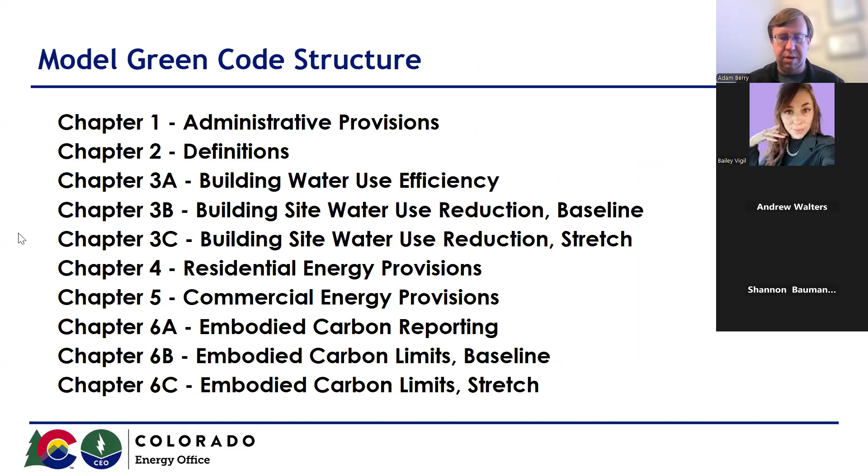So there's probably some questions as to why we structured the Model Green Code this way, with these sub-chapters that have differing levels, where we have a baseline chapter and we have a stretch chapter and we have reporting chapters or simpler, more entry-level chapters. And whereas most building codes are just going to be a long list of requirements you have to meet, and you have to meet all of them unless you're exempted from them, this is structured a little bit differently for a reason. And mainly the reason is to give jurisdictions different entry points into the stretch code.

Recognizing that this is a code that goes above and beyond where most jurisdictions are when it comes to energy or sustainability, we wanted to recognize that not all jurisdictions are in the same position to adopt a really stringent stretch code. And so we wanted to provide some easier entry points where a jurisdiction who may not have the political will or may not have the capacity to enforce, or any other reason, could still potentially see some provisions in this code that may be attractive to them.

Within the water efficiency sections, there's a chapter that focuses exclusively on building fixtures, so things like shower heads, toilets, appliances, all of those different types of things, and reducing water consumption from just the building itself. And then some of these other chapters address water efficiency and reduction of using potable water at the site level.

So things like landscaping. On the energy side, this really does kind of build off and goes beyond the state energy code. So there are a lot of pathways that go above and beyond where the state energy code would take you, but it is designed to layer on top of the state energy code as appropriate.

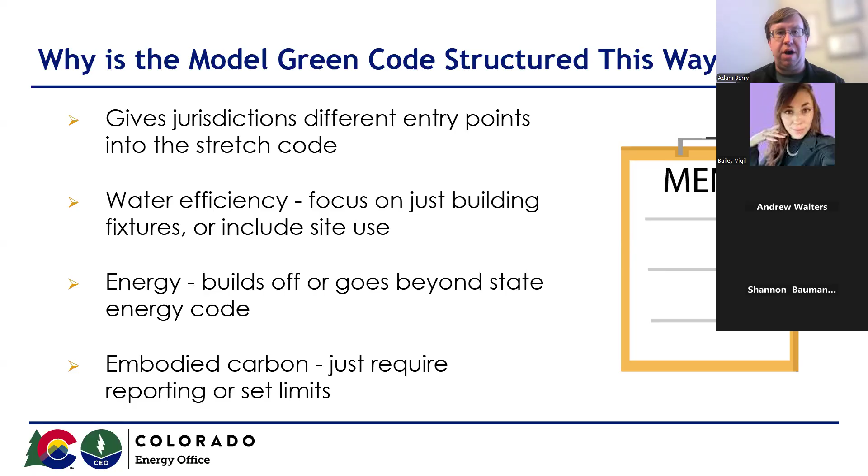And then within the embodied carbon sections, there's a chapter that just requires reporting, and then there's chapters that require actual embodied carbon reductions and limits on the embodied carbon amounts that a building can have either in the materials or at the building level. So recognizing that these different chapters and the structure of the code is meant to be a bit more of a menu of options rather than just one code that you have to either choose to adopt or not.

So that brings up the question of how would a jurisdiction go about adopting this code. So I just want to really quickly highlight that section 101.5 of the code specifically outlines how chapters 3 through 6, which is water efficiency, energy, and then embodied carbon, all work and what they cover, what each of these subchapters covers, and how a jurisdiction should consider adopting based on what their particular interests are.

And so, recognizing that this code is not a code that should just be adopted in its entirety, as most building codes are. If you were to adopt the entire code as it's written, some of these provisions would conflict because some of them are addressing the same requirement, but doing it in a more ambitious way. And so if you were to adopt both requirements, it would be very confusing as to which one you were actually requiring. And so I put down bullets here to what that looks like.

So chapter 3A, as I mentioned, is that one that is just focused on the building water level usage and not the landscaping. So it can be adopted by itself if a jurisdiction wanted to, but chapters 3B and 3C are both focused on that building site landscaping approach. And so 3B and 3C are regulating the same things, but at different levels. And so if you were to adopt 3B and 3C, it would not work very well because there's conflicting measures. So just wanted to acknowledge that you could adopt 3A and 3B or 3A and 3C, but you couldn't adopt both 3B and 3C.

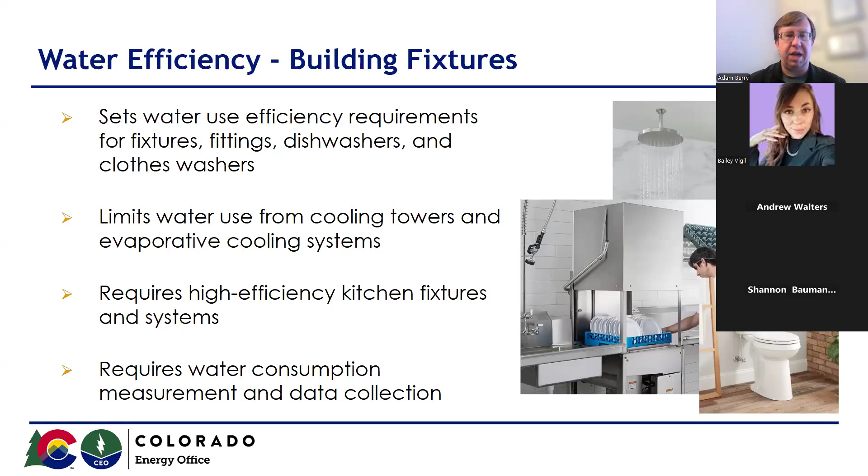Looking at chapter 3B, that's more focused on the site and landscaping of buildings, looking at it from that more baseline level. So this section of the code requires a certain percentage of the landscaped area to be native plants or rainfall adjusted plants. So plants that essentially don't require a lot of irrigation, but are either native to Colorado or are designed in a way that can utilize our existing precipitation and moisture levels, as opposed to requiring a significant amount of irrigation. It limits landscape irrigation with potable water.

So if you are trying to irrigate with potable water, there would be a certain amount that you are allowed to use potable water for, but the rest would have to come from what the code defines as alternate sources of water. And then also having irrigation controls for these systems, to minimize how much water is being used at any given time, and to evaluate whether or not watering of these landscapes is necessary at any given time. It limits how much water you can use on rooftops, vegetated roofs.

So to make sure we're not just spraying a bunch of concrete and actually utilizing the water for keeping plants alive. And similar to the first bullet there, trying to encourage native and moisture adjusted plants to be utilized. And then finally, if there are any decorative water features and pools, even water closets or urinals or anything like that, setting requirements around having to source water from alternative sources other than potable water to use for those systems.

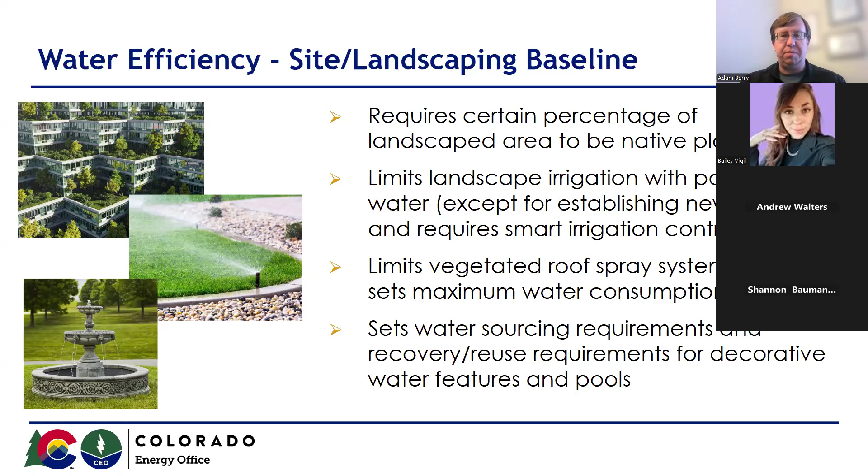And then looking at chapter 3C, which is basically just a stretch version of chapter 3B. Essentially, it requires a higher percentage of those plants in the landscape area to be those native plants or those climate adjusted plants than the baseline. So I think the baseline is something like 60%, and I think in the stretch you have to have 80% of all plants meeting that requirement.

This stretch section prohibits entirely irrigating with potable water. So whereas the baseline just limits how much potable water you can use for that landscaping, this section prohibits it entirely and requires that all water used for irrigation must be provided by alternate sources of water. And also, I just really want to be clear when we talk about irrigation, we're not talking agricultural irrigation. We're talking about watering yards and building sites. So we're not talking about food production when we talk about irrigation in this context.

And then a lot of the baseline requirements are maintained here as well for the decorative water features, pools, and irrigation controls. And then one addition that this chapter has is the requirement to utilize water reclamation systems. So that could be a gray water or other type of water reclamation and treatment system that then recycles the water for other uses in the building. So this stretch chapter of the water efficiency section requires those systems to be installed and utilized.

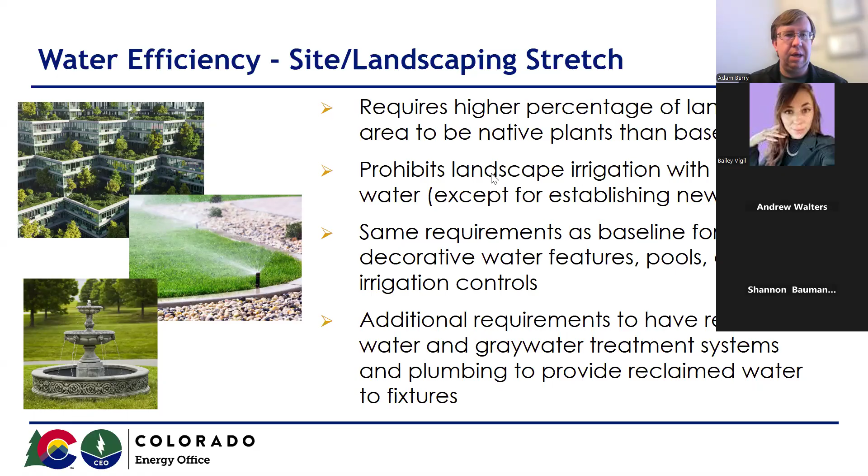All right, moving on to energy. So first we'll tackle the residential side of energy, and then we'll tackle the commercial side of energy. So chapter 4, the residential energy provisions chapter, attacks energy in a way that is above and beyond, as I mentioned, the state minimum energy code. So it establishes a few mandatory requirements for residential energy to have in place. If you are familiar with the low energy and carbon code, some of these are already required in our state minimum energy code, and we just wanted to make sure that they are maintained as well in the green code.

So for example, demand responsive controls for water heating and space heating and lighting systems. And then locating ducts in conditioned space. So ductwork generally is not required to be in conditioned space in the energy code. But if you don't locate it in conditioned space, then you have to do other insulation and sealing requirements. And so there's a lot of value, from an efficiency perspective, in having those ducts in conditioned space. So this code would require that all those ducts are located in conditioned space.

It would require the utilization of energy management technologies, so technology that can essentially monitor energy use and adapt loads as necessary based on either the capacity of the panel or other conditions relating to grid conditions. We actually had an energy management webinar a few weeks ago, so if you haven't had a chance to look at that, I would encourage you to go review that presentation. And then electric, solar, and EV ready code requirements, again, those are part of state minimum code already, and they are just being maintained in this code as well.

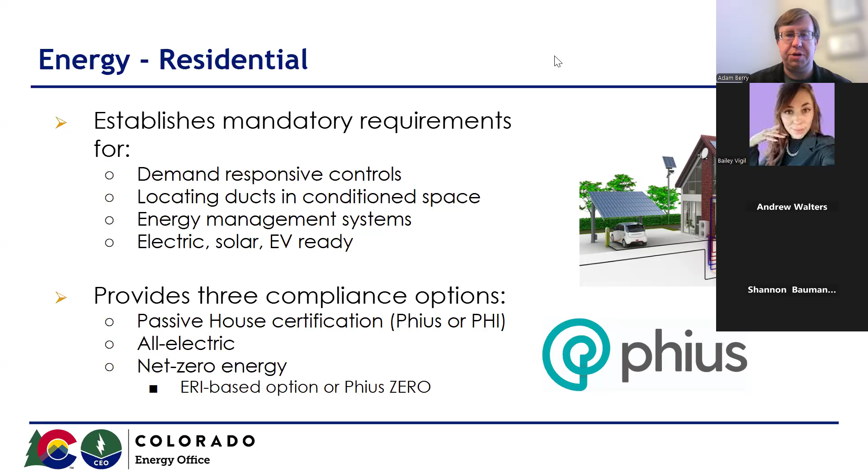Moving into commercial energy, again, similar to the residential side, there are a number of mandatory requirements. Two out of these three are already required by the state minimum energy code: the demand responsive controls and the electric, solar, and EV ready requirements. And then the additional mandatory requirement for the commercial energy side is that these buildings must be provided with an energy consumption measurement and data collection system.

So something similar to what I was describing on the water efficiency side, where you have a system that measures the amount of energy being consumed by the building, at some level dependent on the different end uses, and measuring how much energy they're consuming, and then is able to provide reports on the data collected by that system.

Also similar to the residential side, there are three compliance pathways for the commercial and multifamily buildings. Two of them are similar: one is a passive building certification, again, either through PHIUS or PHI, focused specifically on the commercial and multifamily certifications that PHIUS and PHI have, and then an all-electric building option as well. And the one option that differs from the residential side is an additional efficiency option that is different from the passive house or passive building certification.

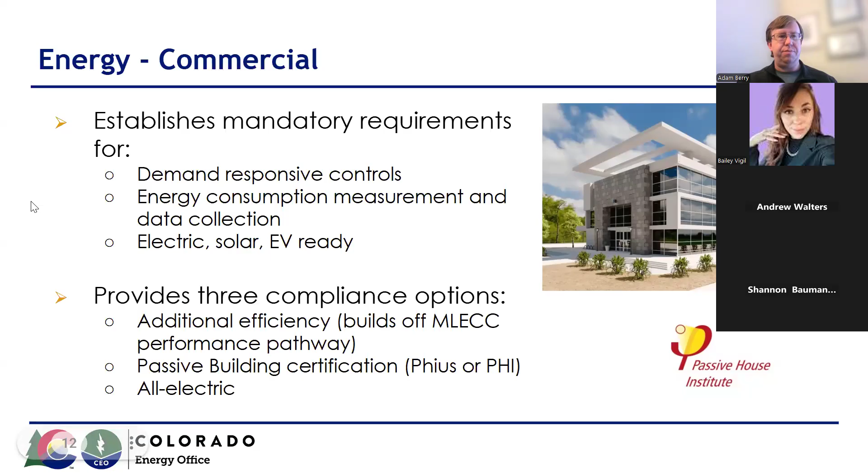All right, finally, we're going to get into embodied carbon. I'm just going to do a brief, quick overview in case there are folks here who are not familiar with what embodied carbon is. I wrote this definition on the right there, so don't be mad at me if there's any slight mischaracterization in the writing of it. But basically, embodied carbon is carbon associated with extraction, transportation, manufacturing, use, and disposal of materials in not just the building industry, but also infrastructure projects more broadly.

So Bailey might mention a little bit there, in addition to the OSA's compliance under the Buy Clean Colorado Act, there are requirements for the Colorado Department of Transportation as well, specifically because they use similar materials, concrete, steel, other things, where embodied carbon regulation is important. So I will pass it over to Bailey to talk about the Buy Clean Colorado Act.

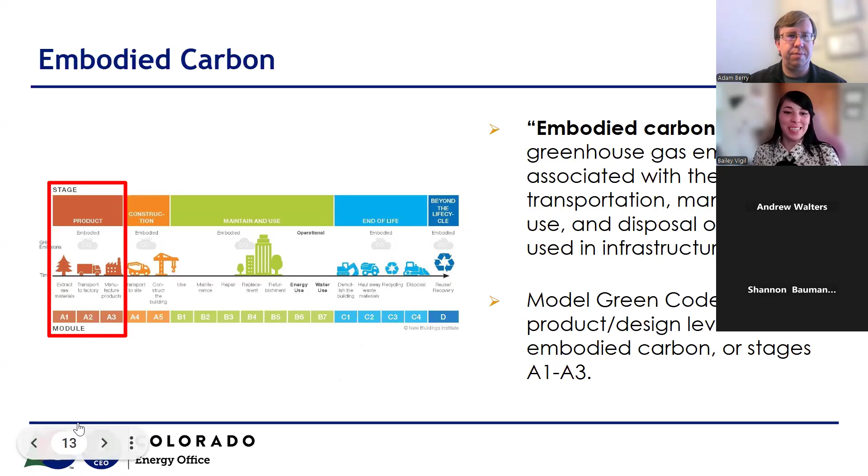Sweet. Thanks, Adam. And yeah, feel free to progress whenever you're ready.

So yes, huge thank you to Adam for including me in this presentation and collaborating with me to ensure that the Model Green Code embodied carbon section and Buy Clean Colorado are in alignment. While the programs are not quite the same, we understand that aligning the requirements where appropriate eases the process for our design teams, our general contractors, and really anyone working on a plethora of projects that may be subject to some sort of embodied carbon requirement.

And so yes, the Buy Clean Colorado Act is focused on reducing the carbon impact of eligible materials for state public projects over $500,000. There's also a note that these projects must issue a design solicitation on or after January 1st of 2024. So any projects prior to that solicitation date are automatically exempt from the program.

House Bill 21-1303 is the legislation that prescribed the Office of the State Architect and the Colorado Department of Transportation to set maximum global warming potential, or GWP, limits for public project materials. CRS 24-92-117 is the statute that directed the Office of the State Architect to set these thresholds. And there is another statute included in this legislation that directs CDOT to set GWP limits for their road, highway, or bridge projects.

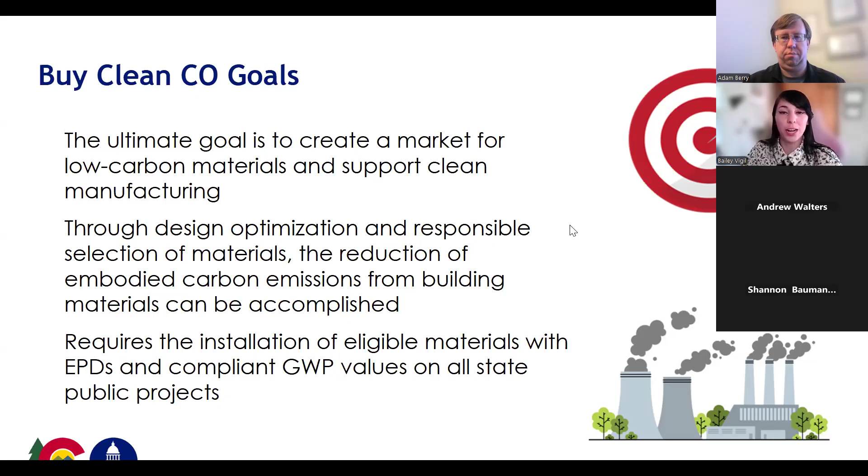So yes, the ultimate goal of Buy Clean programs is to create a market for low carbon materials and to support clean manufacturing. Through design optimization and the responsible selection of materials, the reduction of embodied carbon emissions from building materials can be accomplished. So to do this, we will require the installation of eligible materials with EPDs, or environmental product declarations, basically like food labels, but for different materials. And those EPDs must demonstrate compliant GWP values on all of our state public projects. Next slide.

So the eligible materials covered under the Buy Clean Colorado Act include asphalt and asphalt mixtures, cement and concrete mixtures, glass, post-tension steel, reinforcing steel, structural steel, and wood structural elements. You can go to the Office of the State Architect website under Buy Clean Colorado and find our materials that have defined GWP limits associated with them.

And so a few things to cover here. First, local municipalities that adopt the embodied carbon section of the Model Green Code do not automatically become subject to the Buy Clean Colorado Act. Once again, Buy Clean only applies to state agencies like the Colorado Department of Public Health and Environment or institutions of higher education like CU Boulder.

However, since embodied carbon reductions are pertinent to creating low carbon projects, Adam and I work together and set the Model Green Code embodied carbon limits baseline section to directly reference the Buy Clean Colorado Act GWP limits. So you'll see that in that first limit section, the GWP limits referenced there directly align with what we're doing at the state level.

Yeah, a couple other things. One, Buy Clean programs across the nation are all highly prescriptive. And by that, I mean that these requirements are set on a material by material basis. And so these are great if we're trying to reduce the carbon impact of individual materials. However, for your projects, if you'd like to manage embodied carbon in a more holistic manner, then perhaps taking the whole building life cycle assessment pathway may be better suited for you.

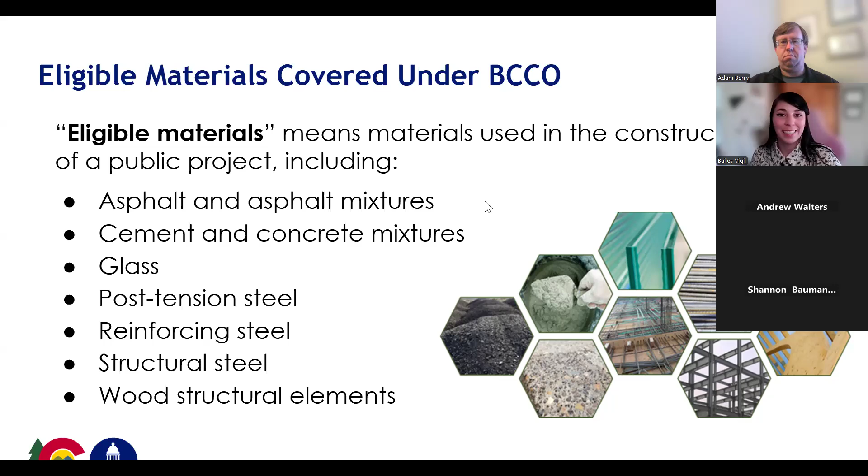And since most of the projects that the Model Green Code might apply to are subject to state sales tax, this is an excellent group to inform of the state sales and use tax exemption for purchases of approved eligible decarbonizing building materials. So this program provides a state sales and use tax exemption, which is 2.9% off for eligible decarbonizing material purchases at the point of sale.

So this exemption applies to any projects that are subject to state sales tax. Our state projects aren't, so they're exempt, but this applies to private work such as personal projects, private corporation projects, as well as local municipality projects. So a couple points here. To receive the exemption, all materials must be approved through the Office of the State Architect and be available on the Department of Revenue's tax exempt list. We have EPD submittal forms available on the Office of the State Architect website, so you can submit compliant EPDs to us for review.

We review the EPDs against our GWP thresholds, those limits, and share any new materials with the Department of Revenue on a monthly basis. So we are regularly updating their team to let them know any new findings. You may only submit EPDs to OSA, Office of State Architect, for review if the associated eligible material has an established GWP limit. So if we haven't set any thresholds for a certain subcategory, then it can't make it on the list. So just a couple things to keep there in mind.

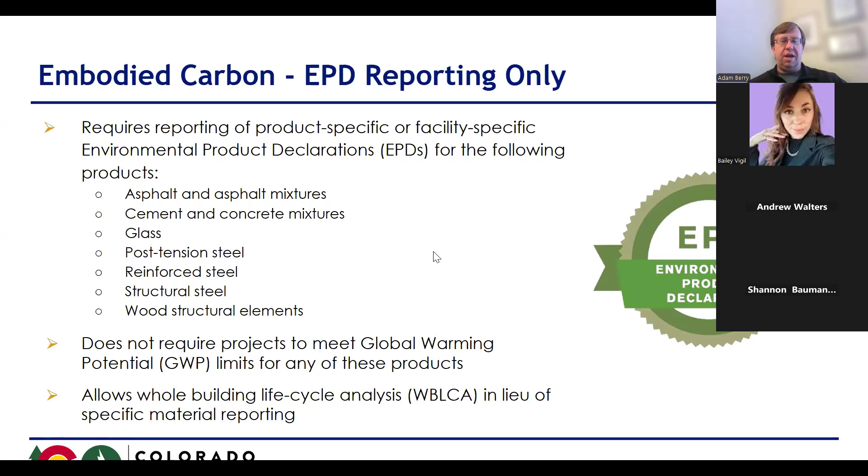Bailey mentioned that there are certain circumstances where this whole building life cycle assessment or analysis, however you want to refer to it, is potentially a viable alternative. So instead of reporting EPDs for every material within these categories that a builder or a developer uses, they could potentially have a whole building life cycle analysis done and submit the life cycle analysis instead. It would achieve a similar outcome in that it would still give the project an idea of what their embodied carbon footprint is, just at more of that project level scale as opposed to on a material by material basis.

Moving on to chapter 6B. So this is where the first actual global warming potential limits exist in the code. These are set on building materials and through these alternative compliance options for both new construction and retrofits. So any materials that would be used in either building a new building or renovating an existing building that are within these material categories would have to comply with these requirements. So there are three compliance options here, and a developer would get to choose between them.

So the first of those is basically the Buy Clean Colorado Act program, the same building material limits, same EPD reporting processes, except that it would just be run through the local building department. As you know, the Office of the State Architect is not going to oversee any actual implementation of this code, but just noting that the provisions of the code are aligned with their program.

The second of those is whole building lifecycle analysis that I was just talking about. So this would essentially require that a new construction or a renovation would have to demonstrate through this whole building lifecycle analysis that the building you are building or the building you are renovating has a lower embodied carbon footprint than a building with similar or the same characteristics and location and all these other different aspects. You would be essentially creating a baseline building for yourself and then demonstrating how you would exceed the embodied carbon reductions of that baseline building through the building that you actually design.

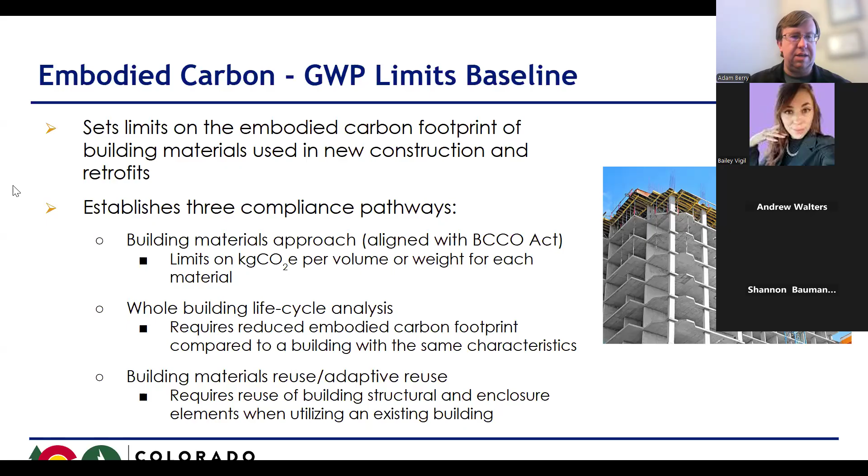Finally, we have Chapter 6C, which essentially is just a dialed up version of Chapter 6B. So it sets more ambitious limits on those materials and on the compliance options for the life cycle analysis and reuse. So for the materials approach itself, again, the structure of the section relies on the Buy Clean Colorado Act structure and those same materials, but essentially it decreases the embodied carbon that is allowed to be representative as part of that material by 10%.

So if you had a building material that had 100 kilograms of CO2e per cubic meter or whatever, I'm just making up numbers at this point, of carbon emissions associated with that material, this section would require you to meet it at a 90 instead of a 100. So basically just lower GWP targets.

The second, the life cycle analysis pathway: whereas the baseline code in Chapter 6B requires a total embodied carbon reduction of the project of 10% relative to that standard baseline building, this section would require a 20% reduction of embodied carbon relative to that baseline building. And then finally, within that building materials reuse section, whereas the baseline section in Chapter 6B requires 45% of those building structural and enclosure elements to be reused, this stretch section would require 75% of building structural and enclosure elements to be reused.

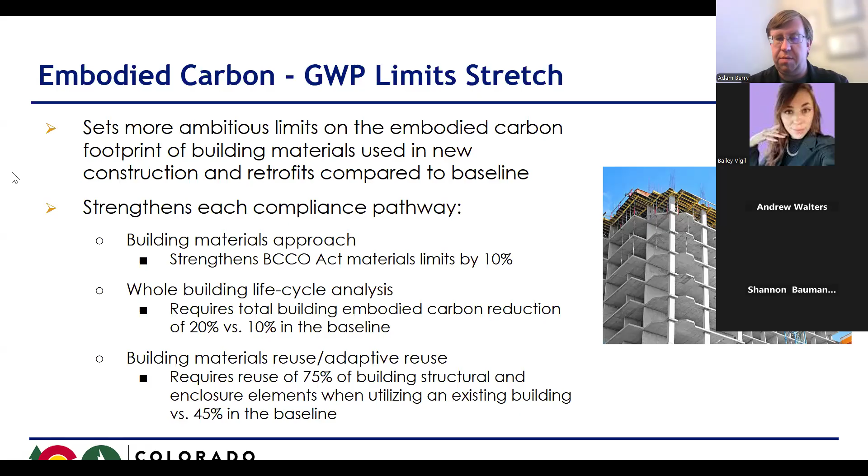But we are working with our vendor at Noresco and some of our other stakeholders to really build up our capacity to provide training to both local jurisdictions and industry professionals on the Model Green Code, on water efficiency, on embodied carbon, on some of these all electric energy and other aspects. So we are working to build up our capacity to do that. And I just wanted to acknowledge that those will be coming in the coming months.